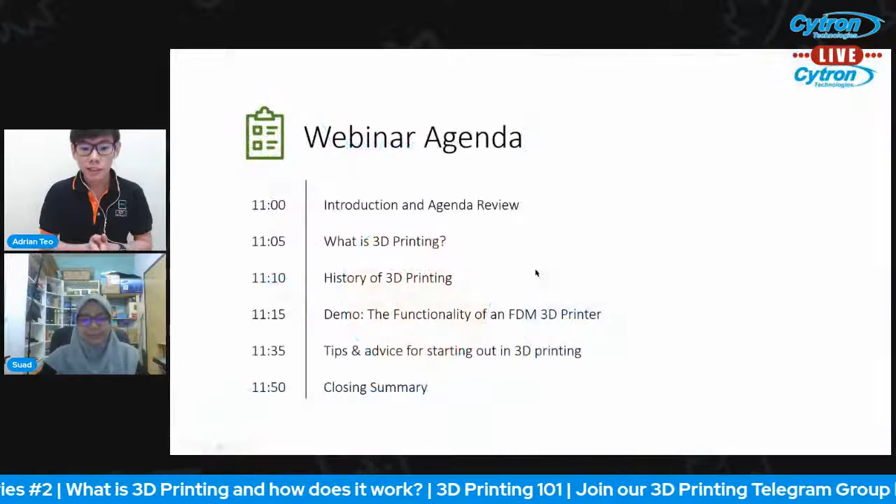So today's agenda, I will be explaining to you what is 3D printing. I'll assume that some of you are new to 3D printing or are curious about what it is. So bear with me, I will spend the first 5 minutes to explain what is 3D printing and a bit on the history of 3D printing.

These are some of the few important and interesting lessons that we encourage you to share with your students, because in order to use a technology, first you need to understand where it comes from, who it comes from, and why it's there. So I will be sharing with you what is a 3D printer, what are the types of technologies of a 3D printer, and the history of the 3D printer in the first 10 minutes of this session.

By 11:15, I will pass the floor to Suad. She will share with you on the functionality of an FDM 3D printer. I hope I answered your question, Mr. Salah Osama. So the demonstration will start at 11:15, hopefully more or less.

I hope I don't talk too much during the introduction, and then the introduction will take around 15 minutes. Okay, Suad over here, she will demonstrate with you her 3D printer. Her 3D printer right now is actually printing something, and you will be able to see it later. She will point out to you which and what are the components and functionality of that 3D printer. So stay tuned, 11:15.

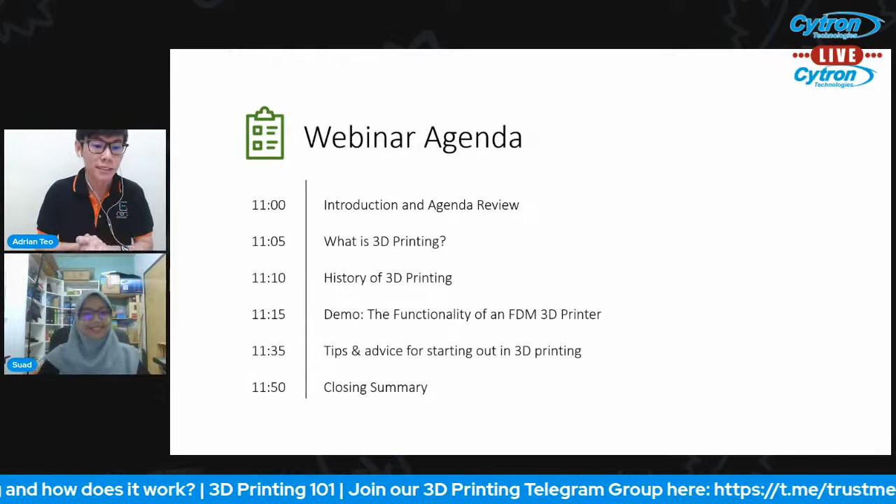This is what live is for. You ask us questions, we answer your questions live. If you plan to watch a video, you won't get the live interactions. So here, we've already got a question. Muhammad Tawfiq asked what is the difference between SLA and FDM. Stay tuned, I will be explaining this in our introduction very soon.

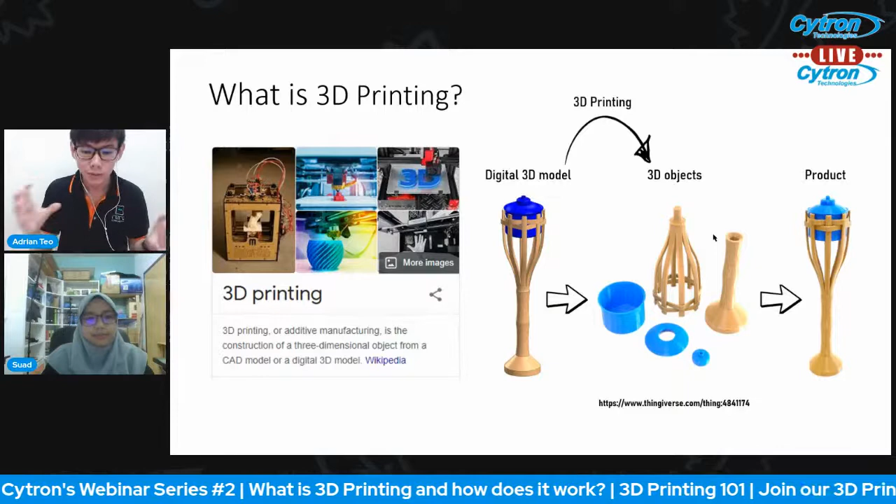So in a way, it's converting digital form to a physical form. And in 3D printing, it's similar. You are creating a product, a 3D object, from a digital 3D model. Just remember this: 3D digital model and 3D physical object, and 3D printing is going to make that happen.

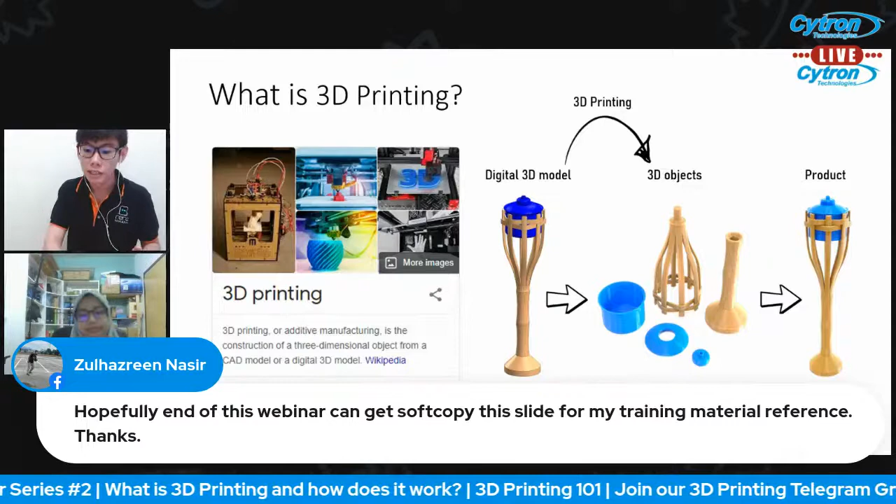So just now I mentioned that I'm going to share with you the types of 3D printing technology out there. I filtered the top three 3D printing technologies, though of course there are more out there, but these are the top three common ones, and they're commercialized so you can actually get your hands on them.

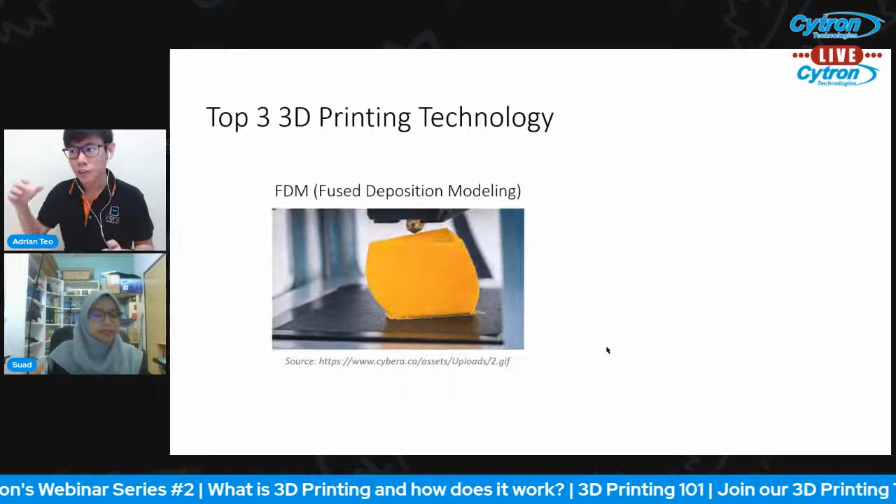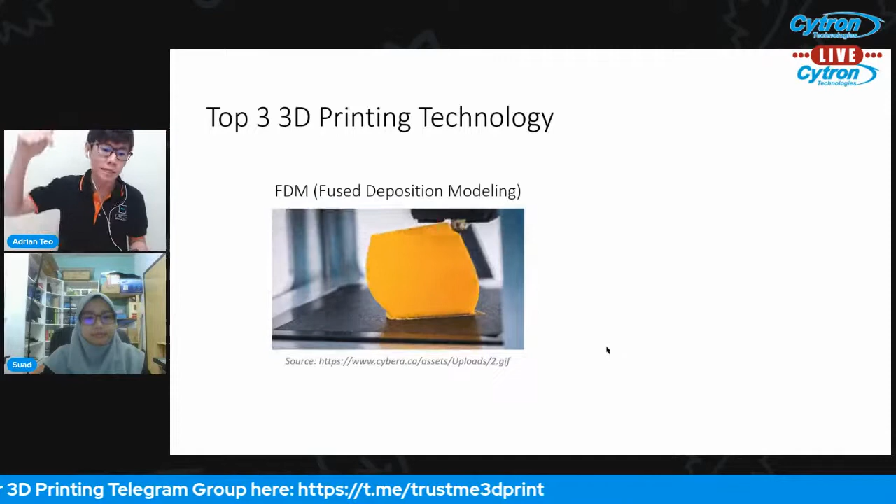The first is fused deposition modeling 3D printing, also known as FDM 3D printing. In this GIF, you will probably be able to relate to all the 3D printers you've seen on the market, or even from schools or exhibition areas, because this is the most common 3D printer out there. FDM 3D printer basically has a nozzle at the top where it melts the material and prints the object, creating it layer by layer. So this is fused deposition modeling 3D printing.

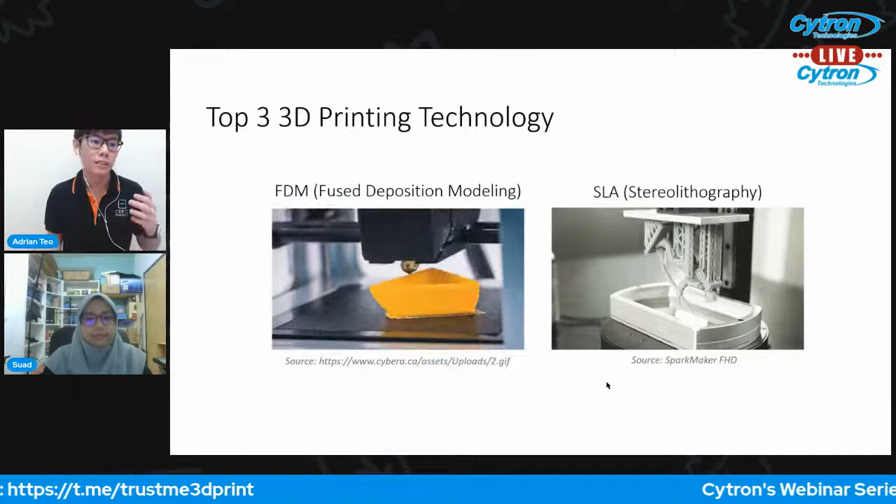Then we have the SLA, stereolithography apparatus, or short SLA 3D printer. SLA 3D printer is a resin curing 3D printer where it beams down laser on the resins to cure them so that it solidifies and creates polymer for your object. If you compare FDM and SLA, they are both totally different technologies, but they still print 3D objects. Both share different benefits, and also have their own advantages and disadvantages. Right now I'm trying to explain to you the differences of these 3D printers.

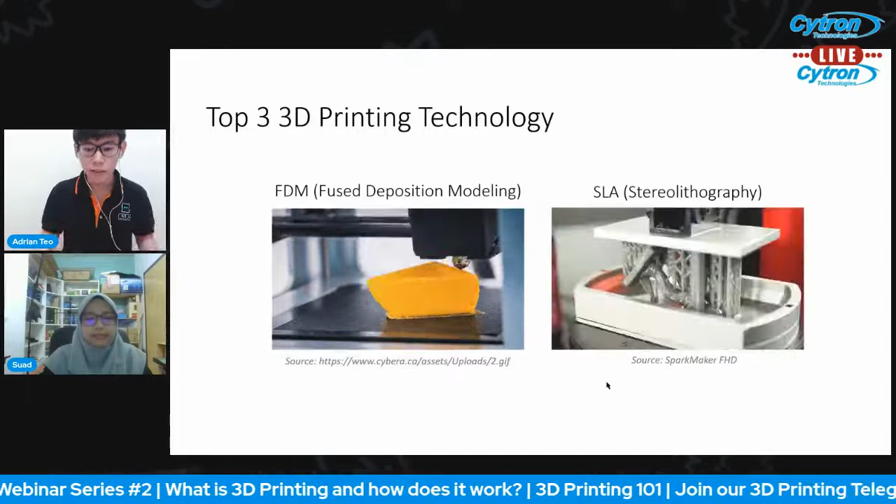Later on we will have a demonstration of an FDM 3D printer, a very common 3D printer out there. It's not messy, we won't be using resins, it's very clean, and anyone can own one.

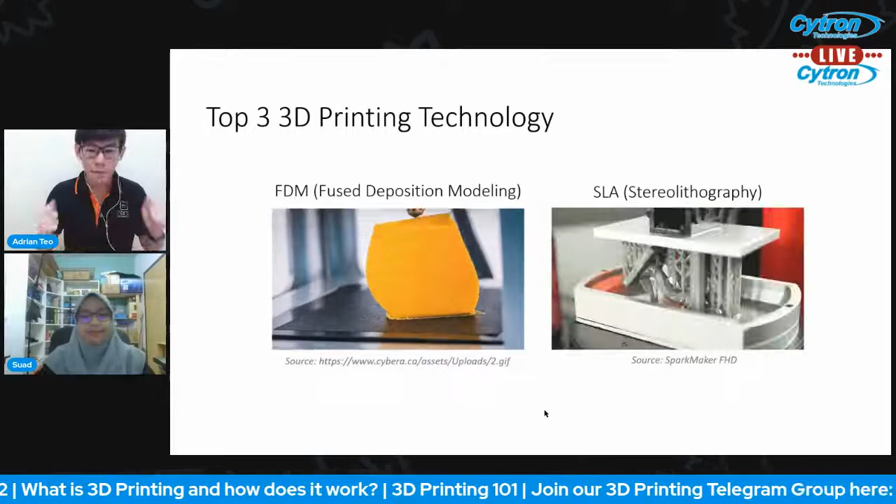SLS uses powder, and it still uses laser. In the name, you see laser sintering: the laser beams down on a layer of powder, and once the high power laser touches the powder, it will join or create a bond between the powder particles to create a polymer. So this will then create an object layer by layer.

So it will first cover a layer of powder, and beam the powder. The area that the powder touches with the laser will then solidify. Then it puts another layer of powder, and the laser moves again, and it goes on layer by layer. This is a very accurate method, but it's of course a bit dusty, a lot of powder. As you go on layer by layer, you're creating a very accurate 3D object using lasers.

All right, let me recap. Three types of 3D printer: first, FDM; second, SLA; and third, SLS. First, you use plastic material. Second, you use resins. And third, you use powder.

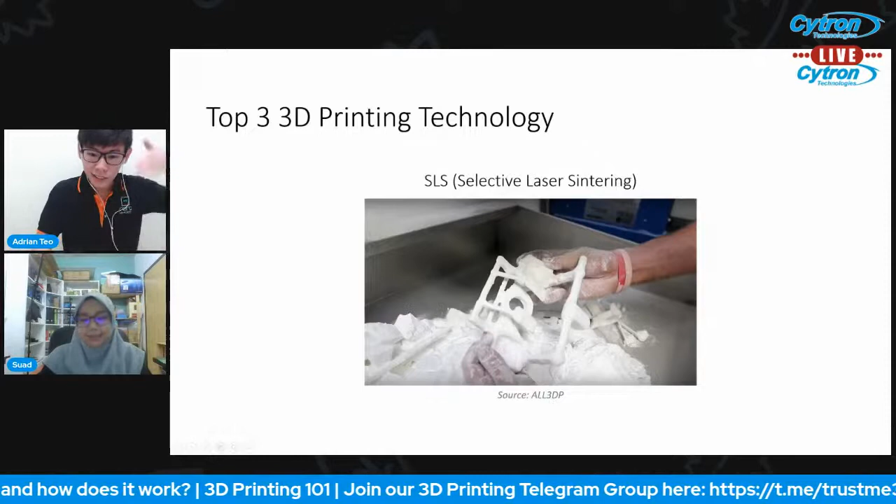Quick question: if you were to choose a 3D printer, what type would it be? Good question, Sharman.

If you're talking about the types of 3D printer I just mentioned, those three types, first you have to identify what quality you want to print in, and then the cost. Do you want to create only something small, or something big? Do you want the parts to be very accurate, or just normal accuracy? So everything matters — your final product matters, what kind of product you want to create. I'll share more detail on the advantages and disadvantages of each technology. I can quickly give you an example.

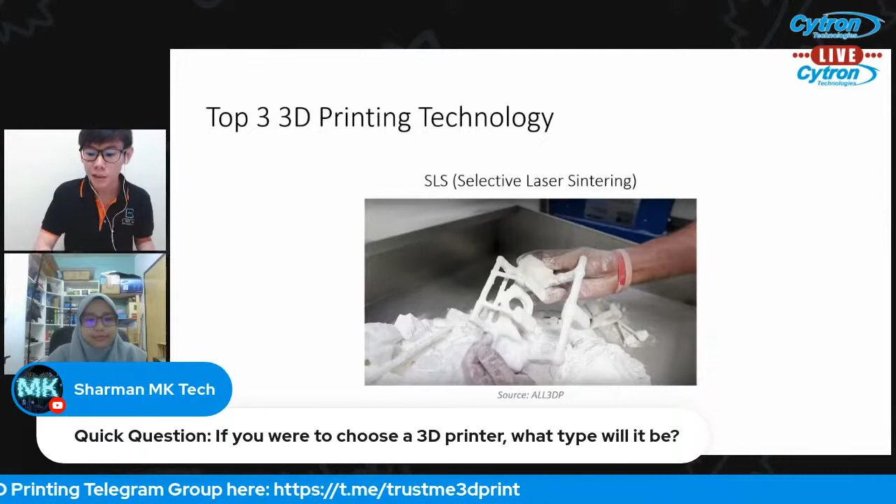SLS and SLA are able to provide a better accuracy product. SLS doesn't need support to print your object. SLA needs support, FDM needs support. That's one example I can give you right now. But I'll be able to give you more details after this session in the Telegram group.

Let's continue — the history of 3D printing. This is like your sejarah class, but I hope it's more interesting. I hope you stay with me for just 5 minutes as I go through this timeline of 3D printing. Take it as a storytelling.

In 1981, Dr. Hideo Kodama was the first person to file a patent for rapid prototyping technology. I didn't mention the word '3D printing' in 1981 because no one knew about 3D printing at that time. Dr. Hideo Kodama patented rapid prototyping technology, which at that time was actually SLA, a resin curing system. Unfortunately, due to some funding issues, Dr. Hideo Kodama did not manage to complete his application for the patent, so it didn't really get through.

Three years later, in 1984, Charles Hull — a very important figure in 3D printing history — invented the SLA patent, the stereolithographic apparatus. He patented it in 1984 and got it accepted in 1986. In that same year, 1986, he started his company known as 3D Systems, which is a very famous 3D printing company today. If you Google 3D Systems, you'll see them everywhere, creating 3D printers for the industries.

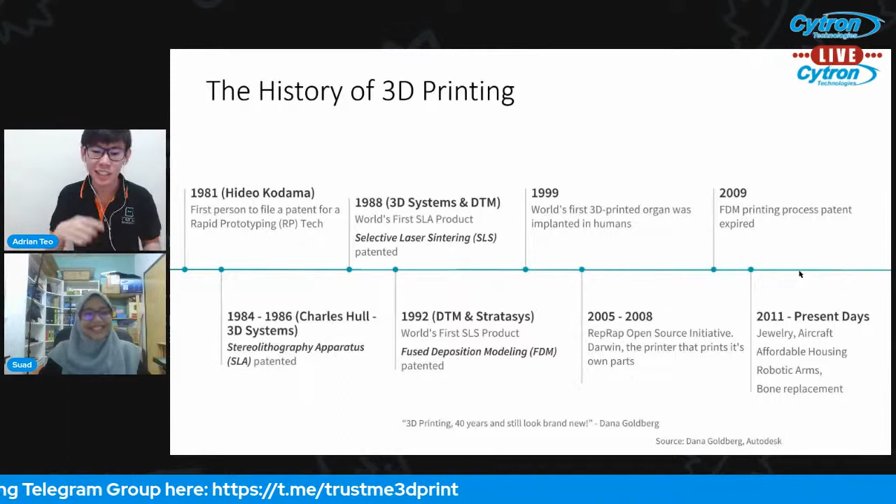In 2005 to 2008, that's where the open source revolution started for 3D printing, initiated by RepRap. The first 3D printer they created is Darwin, a printer able to print itself. That was the most famous printer back then. I even recall in primary school and high school talking about the machine that can print a machine itself, and that machine can keep on printing machines. You'd be rich, you could keep on printing machines. That's actually the printer we talked about back then. RepRap started the open source initiative.

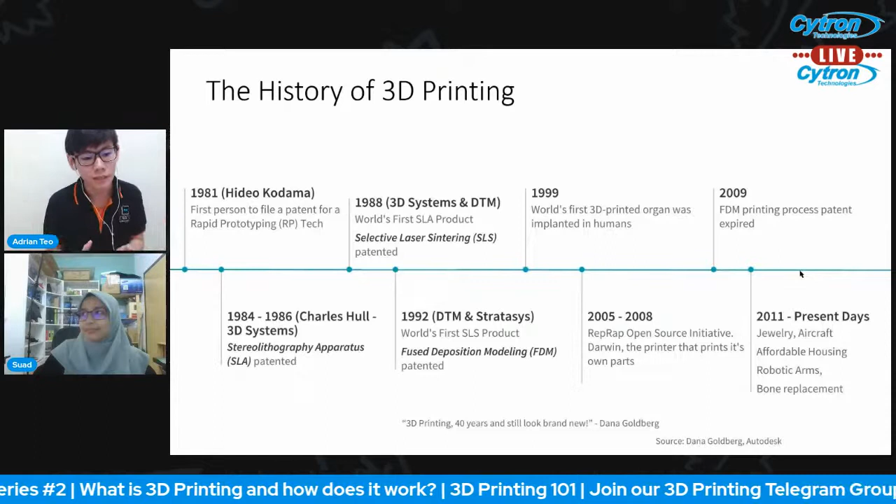It didn't kick off rapidly until 2009, when the FDM printing process patent expired. When a patent expires, everything changes, especially the cost. In 1992, Stratasys patented FDM 3D printing technology. In 2009 the patent expired and the price dropped from 10,000 USD down to less than 1,000 USD. That's when the community finally got their hands on 3D printers. It doesn't mean the printer wasn't available before, it was just super expensive. Once the patent expired, the printer became so cheap, everyone got a 3D printer after that.

After 2009, a lot of startups came in and started building their own 3D printers. Two big companies I can think of are MakerBot and Ultimaker. They came in and built their own 3D printers. After 2009 you actually see a lot of new, affordable 3D printers on the market. That's 2009, 2011 to present day.

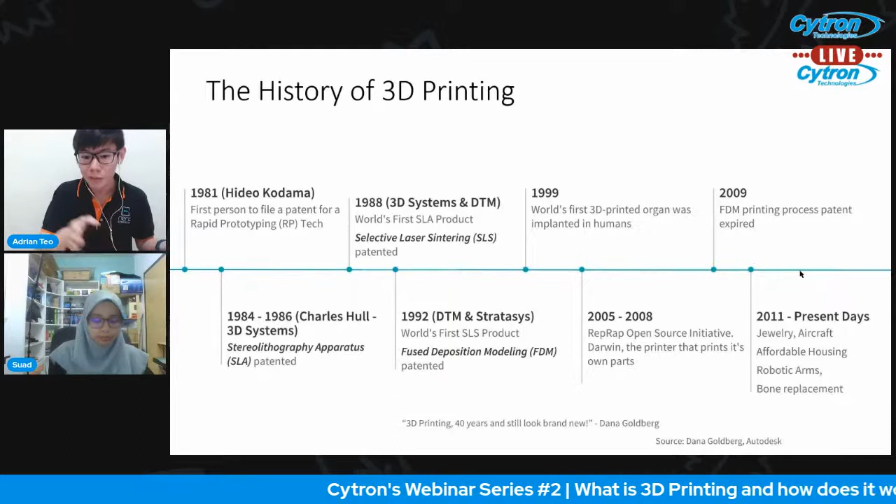Until today we see a lot of innovation in 3D printing technology. People created robotic arms, bone replacements, jewelry, they even built houses with 3D printers. There are a lot of innovations happening around the world because today 3D printers are very affordable, from 10,000 USD back then to like 100 USD today. The difference is huge in 3D printing history.

I'm not going to dwell on the history any longer. I hope you understand the timeline of where the 3D printer comes from, how it came about, and why it's so cheap today.

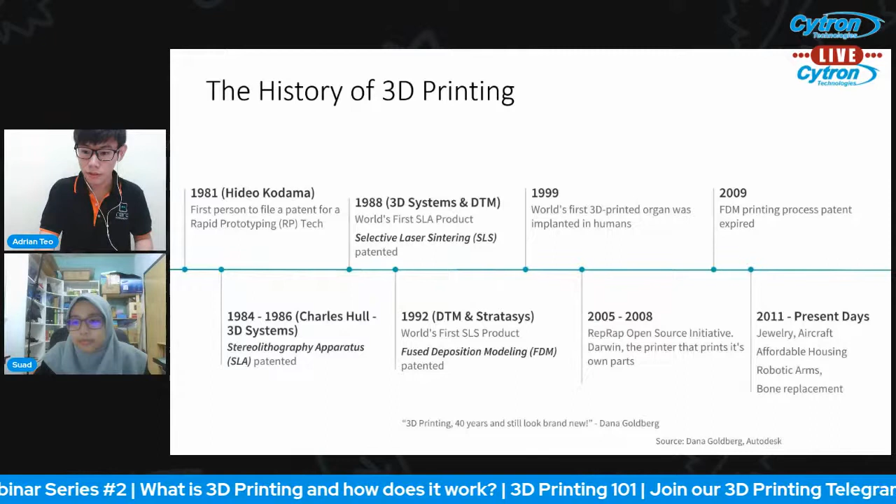As I've mentioned, the 3D printed organs are actually fully functional, especially the organs these researchers created today are fully functional. They use human tissues to regenerate cells and create actual functional organs today.

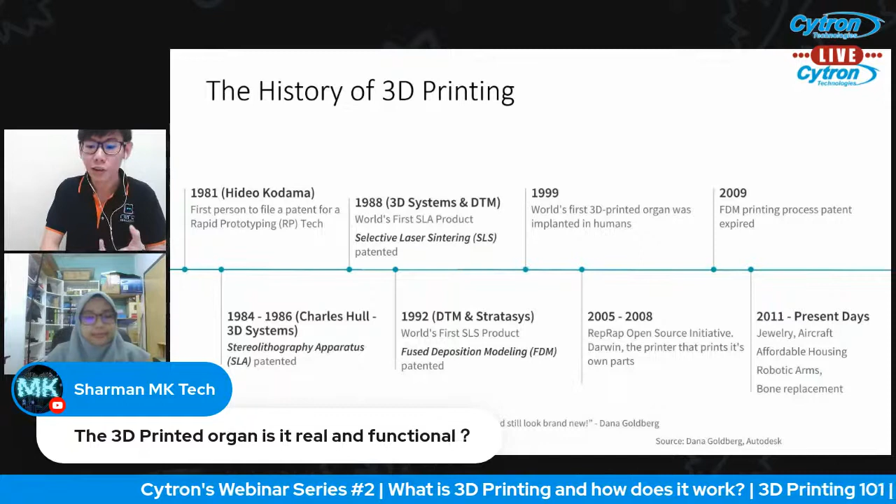Let's take a look at another question: how to standardize printing cost based on rate per gram, since there's now too many obvious price offers from other 3D printing players. The 3D printing cost is totally destroyed, to be honest. 5 to 6 years ago there was stable pricing for everyone commercially, but after 3D printers got too affordable, everyone started venturing into this business, so the price is no longer in control. Everyone gets to decide what price they want, and the price is getting cheaper and cheaper by the day. But in the end we still rely on filament cost, and the filament cost is always fluctuating up to today.

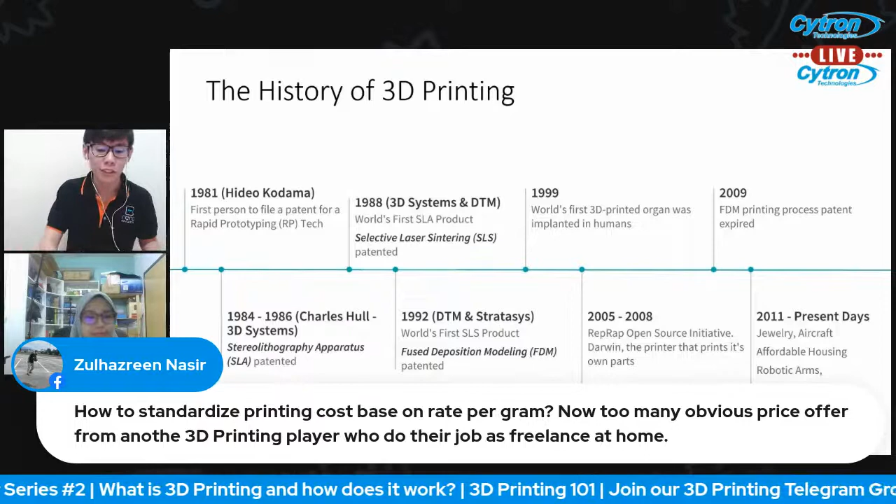She will share with you her 3D printer, which is running right now, ready for you to enjoy. Okay Suad, thank you. Hi everyone. So Adrian, can you share mine?

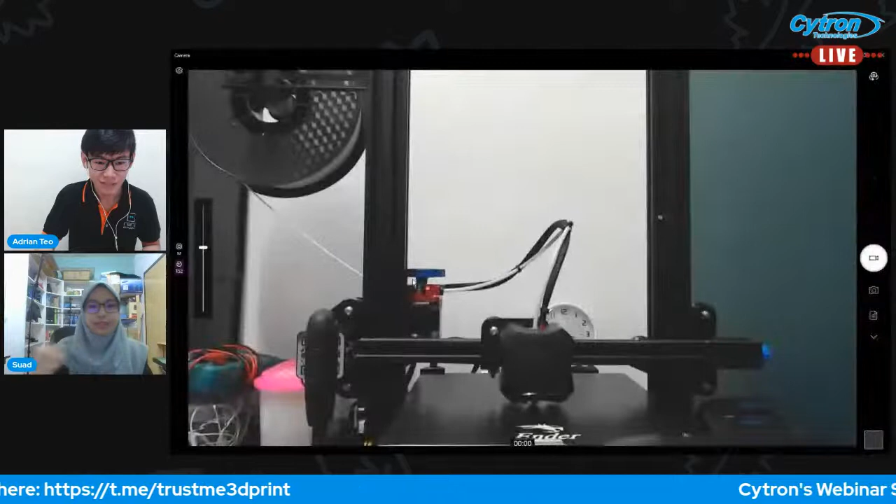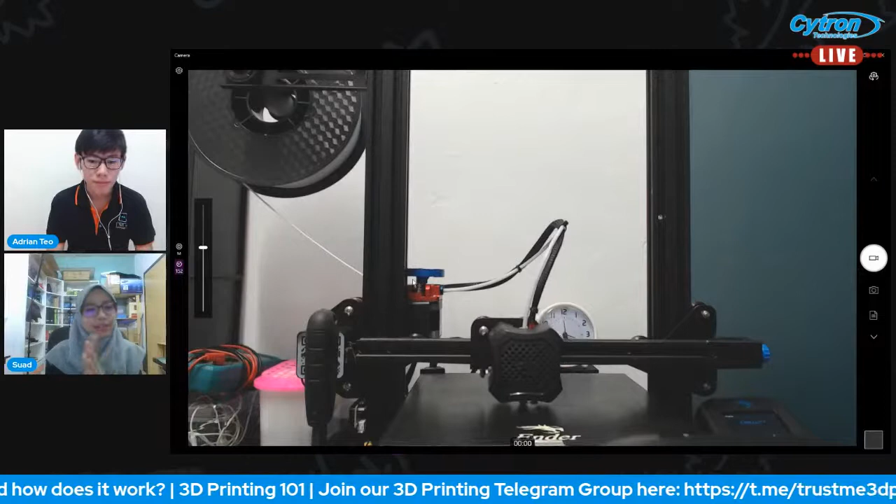I would like to introduce to you guys my first 3D printer. I've used this 3D printer for around 8 months - I think I bought it last year during COVID. So many people were helping frontliners using 3D printers, creating face shields and mask extenders, and I was interested to be part of it, so I bought a 3D printer.

So this is my 3D printer, and this is an FDM 3D printer. Can you guys tell me what brand I use? Anyone? So the brand is Creality, the Ender 3v2 - that's the one I bought. Wow, so many people answered correctly. Yes, it's Ender 3v2, not just Ender 3. We have two versions, V1 and V2, but mine is V2.

So first I would like to introduce to you what an FDM 3D printer is and how it functions. During this session, you will need to remember three important things - three important components. First, an FDM 3D printer creates objects by melting plastic material. This is, you guys can see, right?

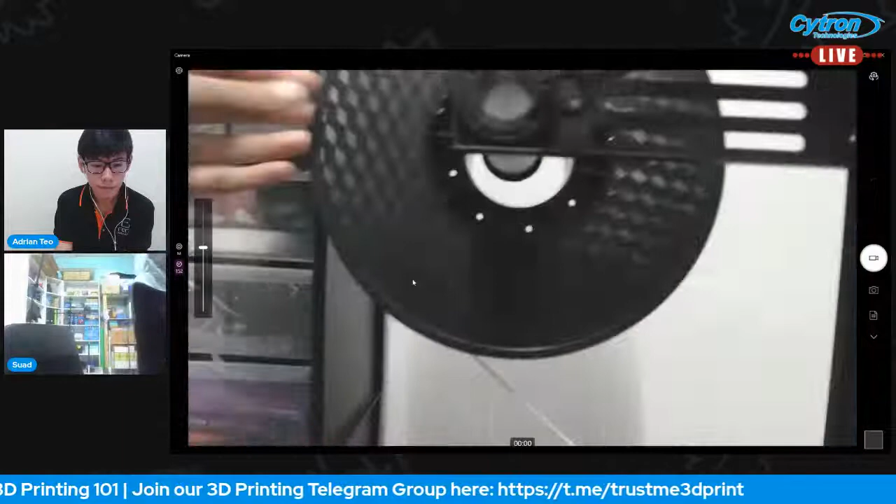Let me just stand. Alright, this is the plastic material that we are using to print, and the material is PLA - the filament that I use is PLA, and I'm using a white color PLA filament. An FDM 3D printer is able to work with different types of material with different characteristics, such as ABS and TPU, but what I'm using is PLA because I heard that PLA is good, especially for beginners. That's why I use PLA compared to other types of filament material.

That's the first thing you need to remember - we need to have a filament. Then the filament will go into the extruder. This is the extruder, you guys can see, right? So the filament will go into the extruder, then go through the tube, and then go to the nozzle. Can you guys see the nozzle?

The nozzle is currently melting the filament and printing something. Never touch the nozzle so that you won't lose a finger. I never touch it because I'm not that brave.

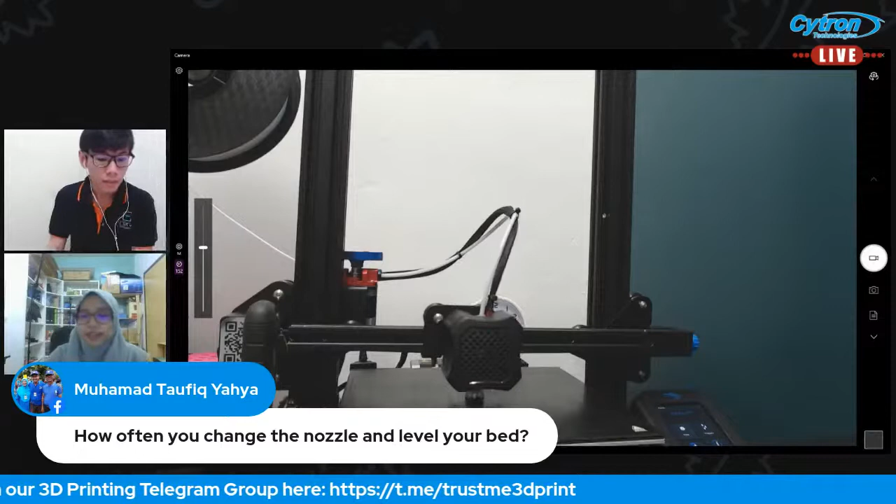How often do you change the nozzle and level your bed? Actually, I've never changed the nozzle before because it still works perfectly. But if you ask me how often I level my bed, whenever I print something, I will level the bed.

If the bed is already okay, and when I remove the filament or the 3D object from the bed easily, I will not level the bed. Unless when I start to print and the alignment is a bit off, not flat. When the filament doesn't stick to the bed, then I will do the bed leveling.

Okay, so you have to take note on that.

Let me add a bit on this question. The nozzle, if you print a lot, you may need to change it very frequently. But if you print a small amount of items and take care of your nozzle, clean the hole, brush it, keep it clean, it can last you for a very long time. But if you print something like ABS or high temperature items, the nozzle will wear off very quickly because it's made of brass. You knock the nozzle a bit, the hole will become smaller or deform, then you will need to change to a new one.

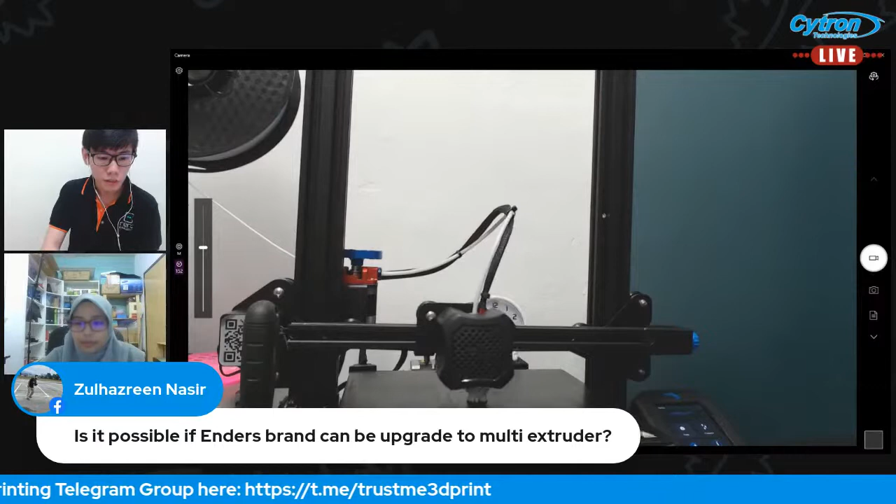Let's move on to the next question. I think I can take this one. Is it possible, if the Ender brand can be upgraded to multi extruder?

I would say yes, if you know which firmware you need to upload. Multi extruder means you can print multiple colors. You can put multiple filaments into multiple extruders, and have multiple nozzles to print by changing different filaments. So it's upgradable, yes, but you may need to change your firmware, as it may not support multiple extruders by default. I believe it's quite flexible for Ender printers, you just need to find the right firmware.

Okay, let's see. All right, this question, would you like to take it, Suad? Do you need a high-end notebook to support this 3D printer?

I'm not sure actually about this, but when you want to print something, you need to slice it using a slicer, for example the Cura. If that software can run using your notebook, computer, or laptop, then it will be okay. You don't need a high-end notebook to support this 3D printer.

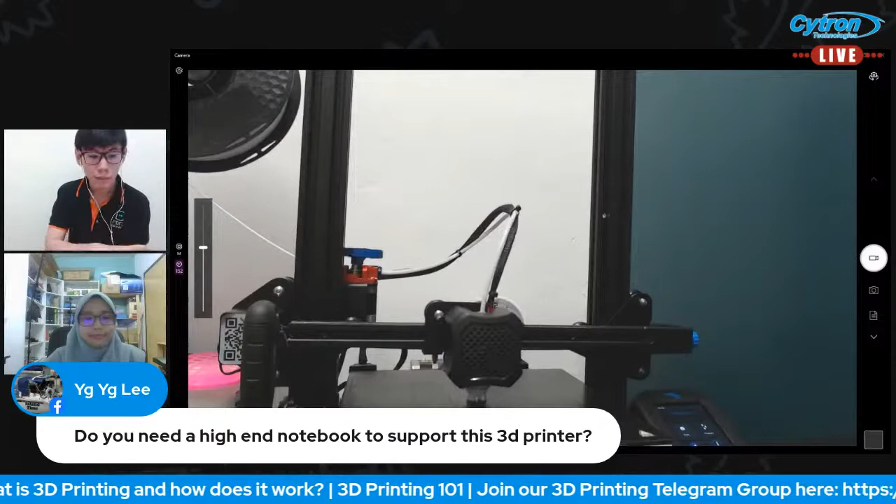Let me shine some light on this. To be exact, you don't need a supercomputer or a very high graphic computer. I am using an i3 laptop with no graphic card, only an Intel graphic card. An 8th gen Intel i3 with no graphic card, and I'm able to run 3D modeling software and Cura software. As long as you're able to run those software, you can convert and process your files for the 3D printer, and that's fine.

The laptop that a lot of schools in Penang use is actually just over 1,000 ringgit, and it works well. You don't need a very high-end laptop, that's my opinion. Thank you for the question. Let's take one more question, and then we proceed to the next part of this presentation.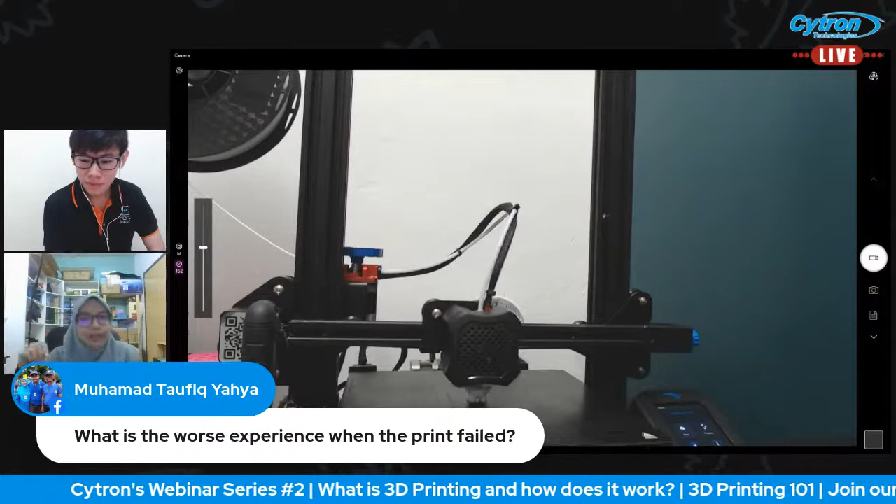Okay, this is interesting. What is the worst experience when the print fails? I don't think the worst experience is when the print fails, because you can always print new things whenever it fails. But if that thing takes like a day to print, and it fails, then that will hurt a bit.

But I think the thing that hurt me the most is, since I'm a beginner, you guys can see there's a lot of scratches on my bed.

That's not so beautiful, and that hurts me most compared to a print fail, because whenever the print fails, I can always print new things, but if the bed is already scratched, that scratches your heart too. You need to buy a new glass bed already. I think that's the worst experience. You need to level your bed properly before you start to print, that's the most important thing I think. I think that's one of the worst experiences anyone can get - when you first print, it starts scratching your bed already, and you've spent so much money, and then you see the bed printing.

What I would advise for anyone who has ever thought of 3D printing or started to 3D print, is you have to be ready that there will be a lot of failures, because you won't know what's going to happen. You can check your bed, your nozzle, your temperature, your software, you check everything, and in the end it still fails. So 3D printing has a very steep learning curve. It's a fun way to learn because you will be getting a lot of problems. Today you will get bed issues, tomorrow nozzle issues, and the day after filament issues. You will get different kinds of problems.

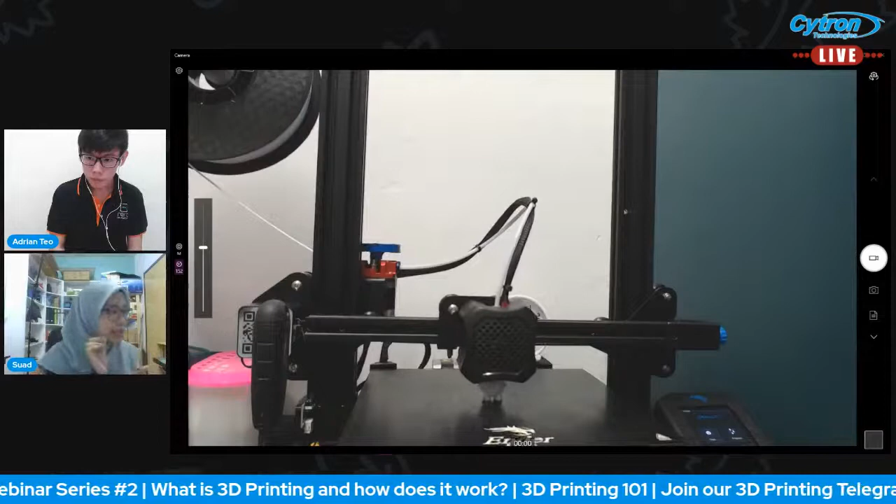So that the model can stick. Yes, very true, okay. If the temperature is low, the filament will not stick to the bed and then you can't print. Thank you, Muhamad Taufiq. Yeah, because it helps the filament to stick to the bed. Last time I also had a problem where the filament didn't stick to the bed because the temperature was not properly set. So you need to heat up the bed properly, to a certain temperature, so that the filament will stick and print your 3D object.

So over here, can you guess what I'm printing right now? You guys can see, right? I'm printing something. Wait, you can't guess? Wait, let me adjust my camera. Let me adjust the zoom focus. How to see, cannot see clearly. Is this better?

White guy, Among Us character. No, it's actually this one. A Marvin keychain.

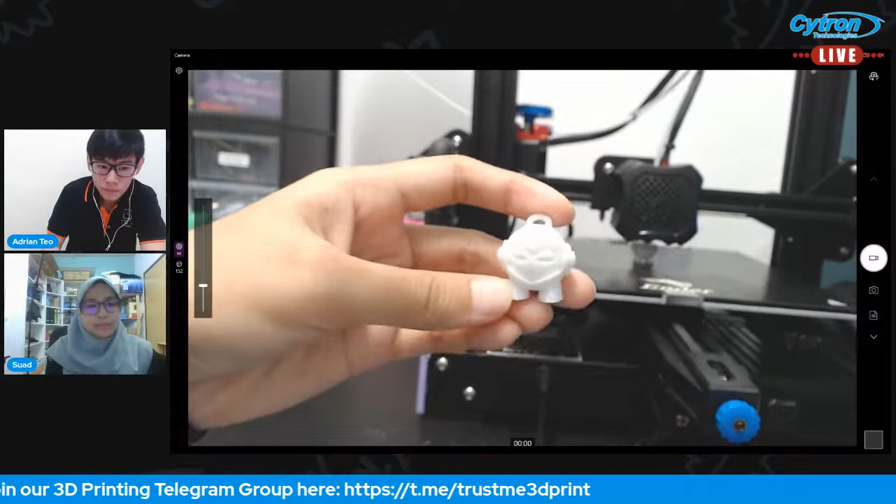You guys see? Okay, actually I printed this before we start our webinar series. When Adrian starts to talk his part, this one is already finished printing. And then I print a new one. So that is the new one. Okay, let me just wait.

Okay, when you want to start a 3D printer, you need to insert an SD card here. Let's see, right? But then I don't have an SD card here. Why? It's so mysterious, right? I didn't insert any SD card, but how come this printer prints a 3D object? I will share with you guys later.

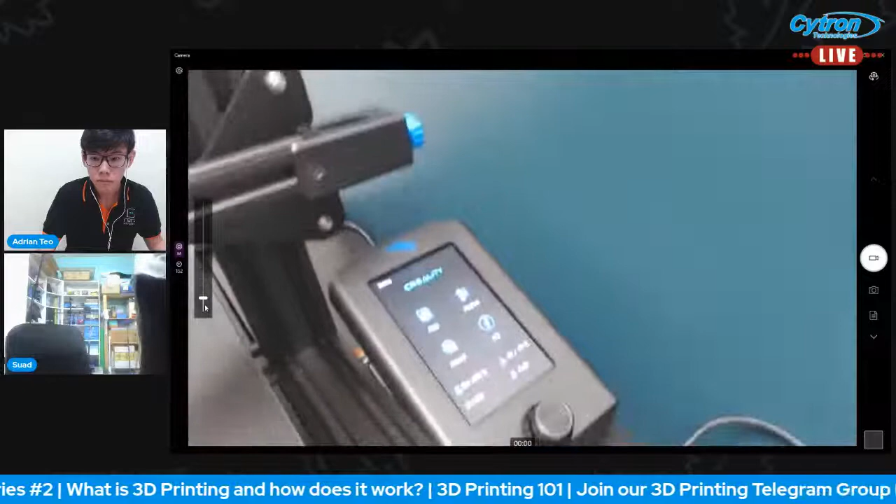Okay, and this is the control panel. Let me adjust this. Okay, you guys can see there is... oh no, not so clear. Just this. Only this part. Okay, so this is the control panel where you can control everything through here.

Okay, this is the print option, and then this is prepare, and then this is control. You can just move this, turn this knob, to do whatever you want to do with the printer.

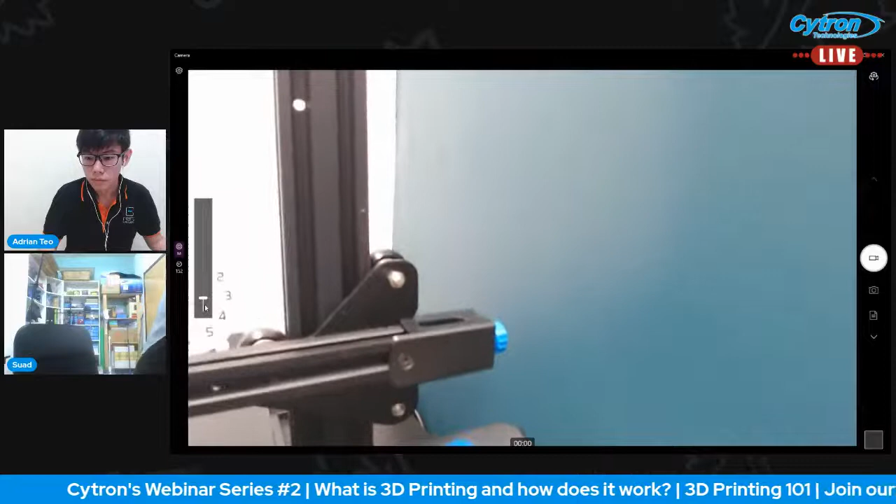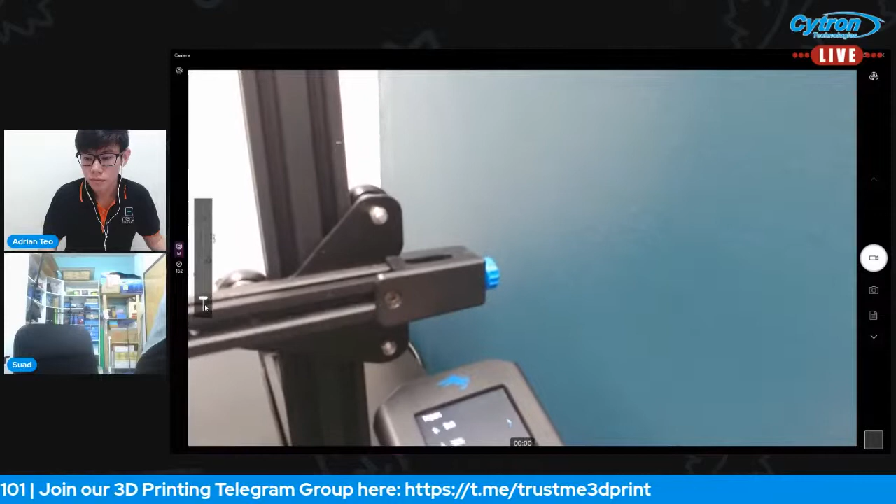Let's say I press for the prepare, and then you have a choice here to set it to home, set the home offset, preheat the PLA, preheat the ABS. But I'm not using this. During the printing, you can't actually disturb the control panel because it will stop the printing process. But today I can do that because I'm not using the control panel to control the printer.

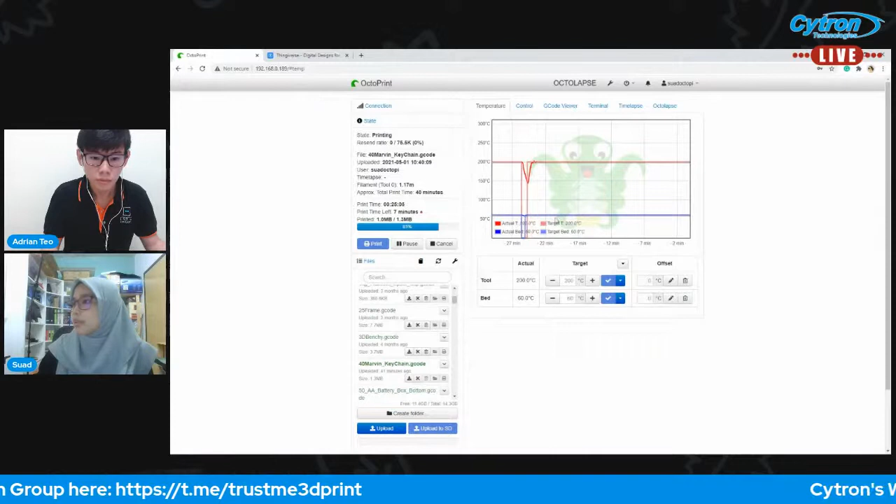As you guys can see here, I have a Raspberry Pi, because I control it using my OctoPrint. Let me see here. So this is my OctoPrint. You guys can see the temperature here.

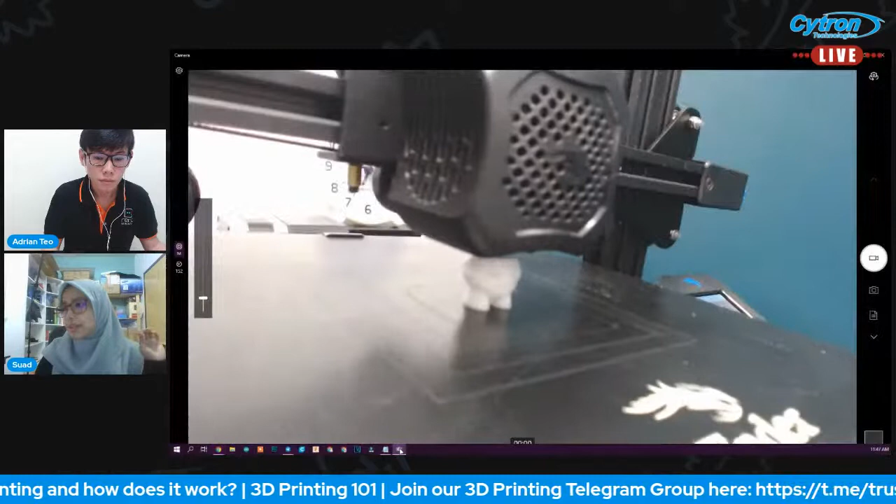And then this is the camera for the OctoPrint. I have two camera set. One is this, and then another one is for the printer itself, so that you can see what happened to your printer whenever you are not with your printer, through your network. This is how I control my printer using OctoPrint.

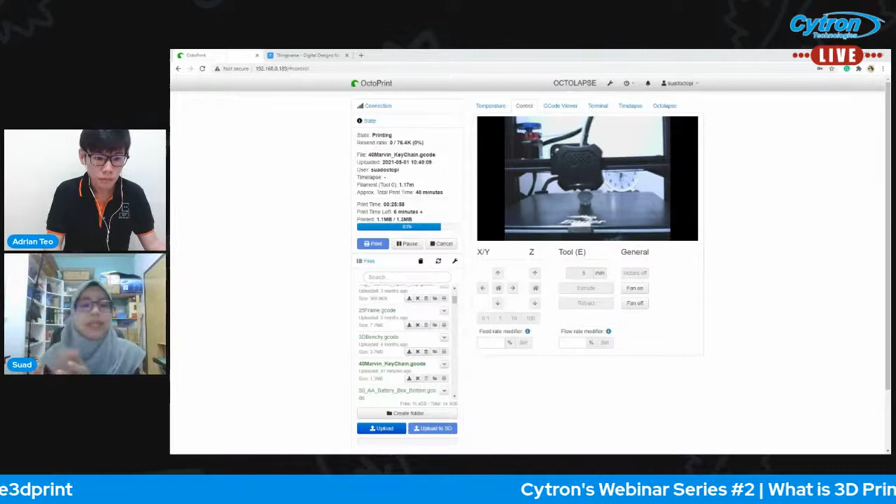And then another thing that you guys can know, there is so much upgrade, so much more things that you can learn from just printing a 3D model. You can also do OctoPrint, and you can also add BLTouch to avoid scratching your bed, because BLTouch will help to level your bed properly.

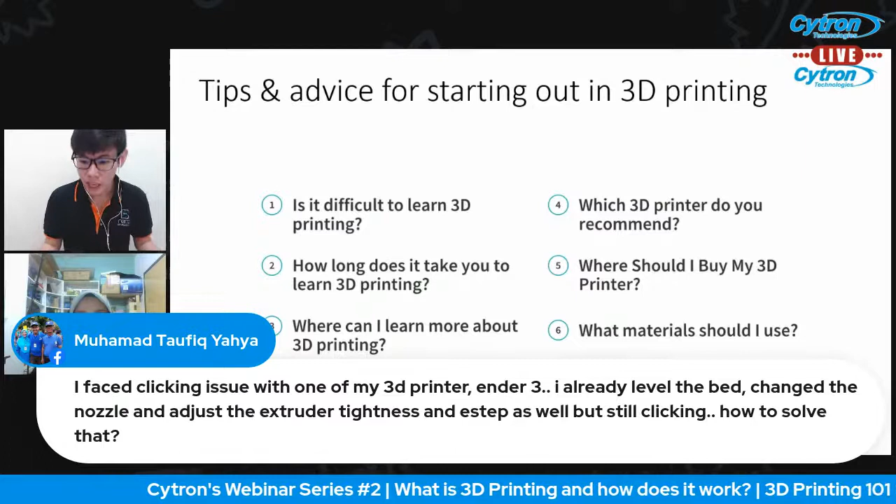I face clicking issues with one of my 3D printers. I've already leveled the bed, changed the nozzle, adjusted the extruder tightness and E-steps, and it's still clicking. How to solve that? This may seem intimidating to people who are still learning 3D printing, because there are so many issues you get every day. You want to print something and it doesn't work. But don't be afraid, you just need to ask someone how you can solve your problem. The expert may not have the straight answer, you will have to go from point A to point B to point C to get your answer.

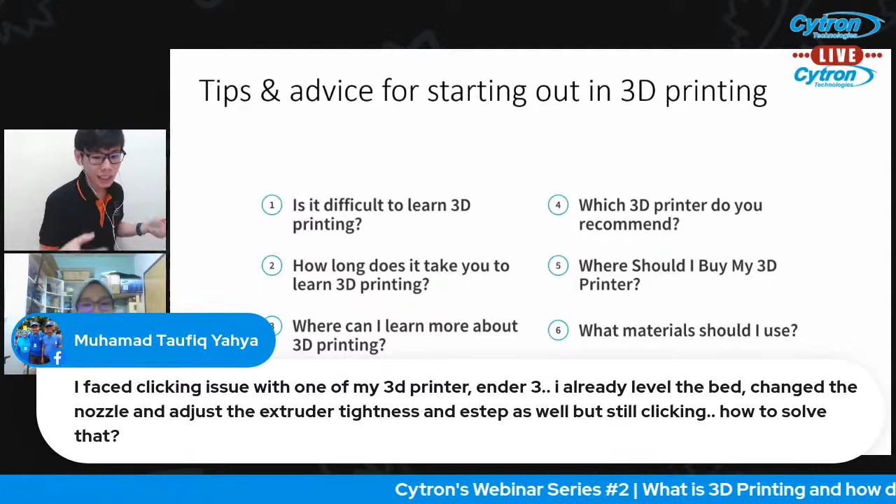So right now, I've seen that all the steps you've done are level the bed, change the nozzle, extruder tightness, E-steps, but you haven't looked at the filament yet. It could be the filament has already absorbed moisture or is already wet, so you may need a dehumidifier, or you may need to dehumidify your filament. You can try using a new set of filament to see whether the issue repeats. If the problem disappears, it means your filament was already wet, so you will need to take care of the filament.

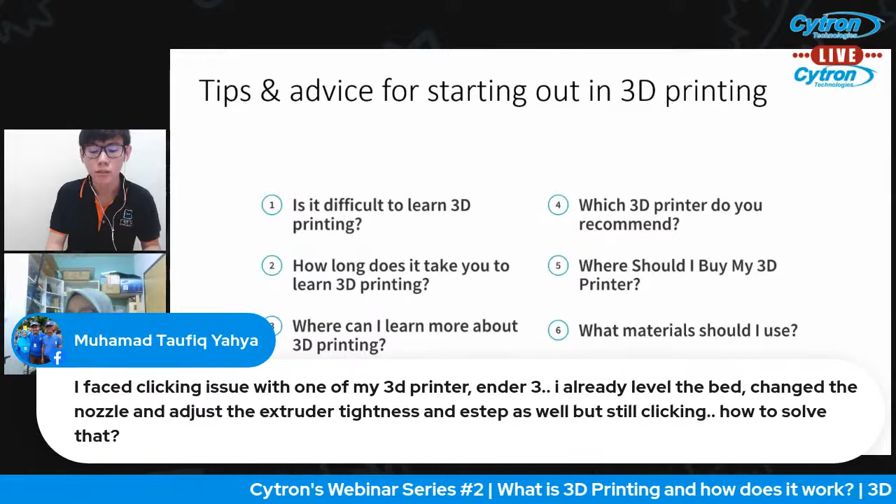So again, every issue you face in 3D printing has a solution. It's an open source machine, you will surely face problems, things will wear out, but that doesn't mean there won't be a solution.

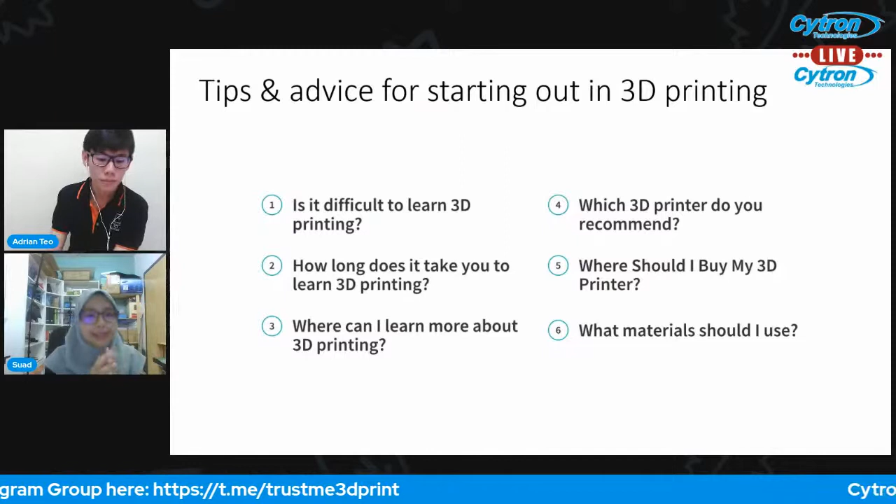For me, because I already have a mechanical background in these things, I don't think it is very hard. At first I had a mindset like, should I buy it? Should I try it? Is it difficult? After doing some research and asking so many people about this 3D printer, I decided to buy one and try it myself. I found that at first it's a learning process, there will be some difficult parts and some enjoyable parts. When you're able to print something using the 3D printer, I think that will be the best moment.

What about you? Is it difficult to learn 3D printing? I am not gonna lie, it's not easy, but it's not very difficult. You don't need an engineering bachelor to learn 3D printing. You can be an art person, you can even be an accountant to learn 3D printing. There's no fixed background that you need. Imagine it like a toy, but an advanced toy for you to practice making things. So 3D printing is just that. You don't have to worry about how difficult it's going to be, because you will have a lot of things to learn, unless you hate learning, then I'm sorry. But yeah, it's not difficult.

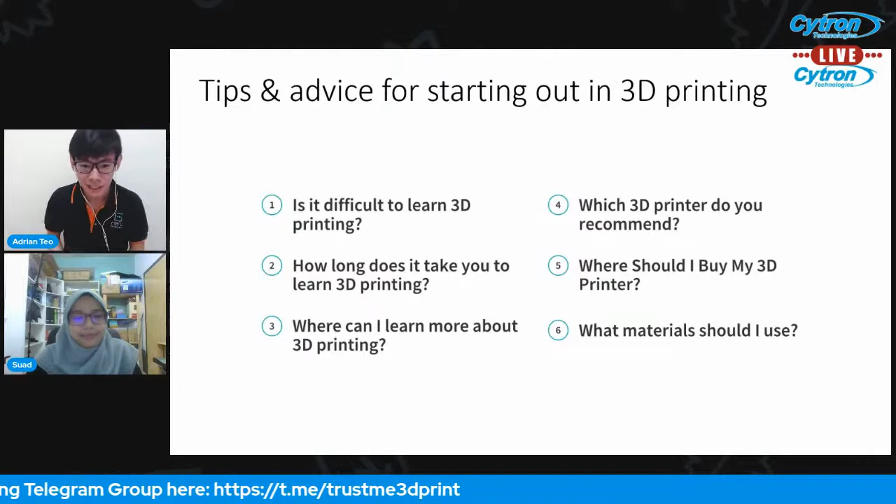I've been practicing 3D printing for the past 5 years, and I'm still learning today because there are so many new problems on my 3D printer every single day. So I'd say it's a lifelong journey, you have to learn every single day. Some days you take one day to learn how to get it working, but it takes a long time to really understand it.

Thank you for your answers, keep it coming. Question three: where can I learn more about 3D printing? This one, I just go to YouTube, Google, and of course I will always ask Brother Adrian about 3D printing because I don't know who else I should refer to.

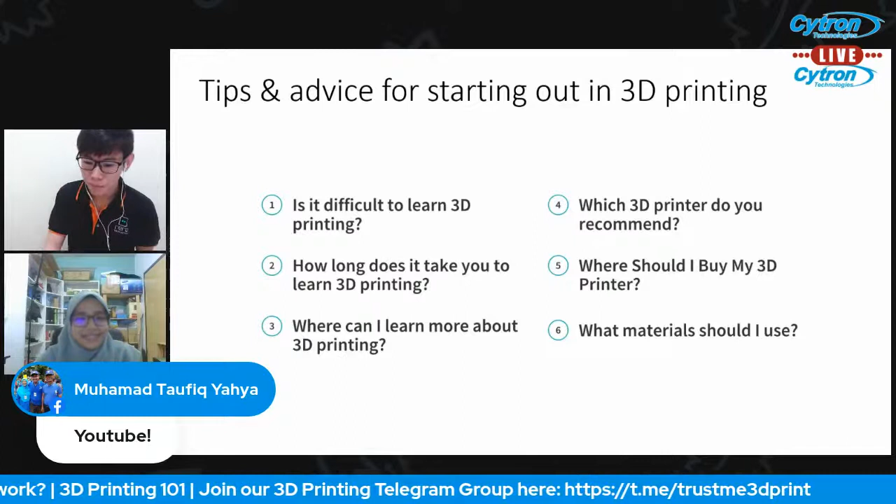Yeah, YouTube, that's the best answer. YouTube, Google, that's the best answer. Imagine 3D printers came out 30 years ago, no YouTube, no Google. But today we have an abundance of resources online. Use it a lot.

But one advice that I would strongly recommend is if you are planning to get a 3D printer, get one that is already well known to everyone, to the community. Don't get a brand new 3D printer that no one knows about, no one knows how to fix, and there's no support — then you'll be the only one fixing your own problem, and no one is able to help you. So get a popular 3D printer, a well-known brand.

This leads to our next question: which 3D printer do you recommend? For me, since I only have one 3D printer right now, I don't have any other to test out. But if I would recommend you guys buy a 3D printer, if you're a beginner, I'd suggest the BIQU B1 over the Ender 3 V2, because the Ender 3 V2 needs you to assemble a lot of things, compared to the BIQU B1, which is very easy to assemble. That's my answer — BIQU B1.

Thank you. So everyone has a different preference on 3D printers. I'd highlight that you need to know what you want first — what you want to print, how good you want it to be, how many you need to print — before you decide on a 3D printer.

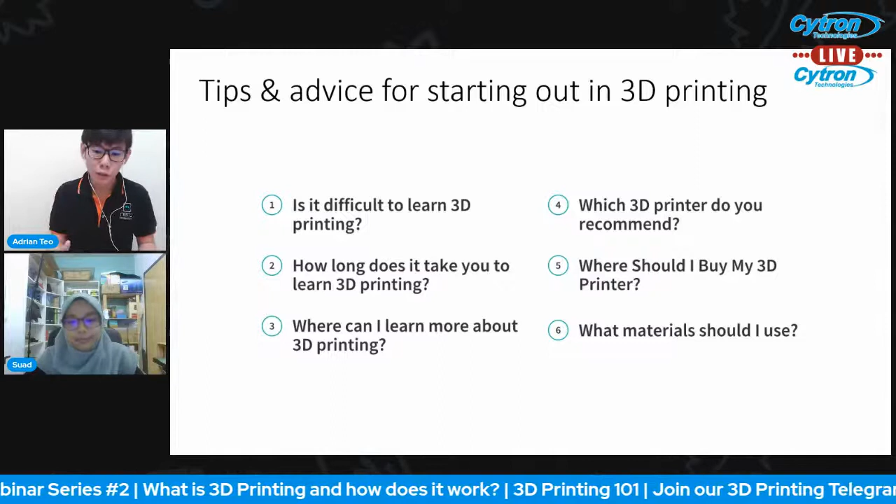Because we're running out of time right now, I'm going to quickly go through the remaining questions. But of course, bring these questions to our Telegram group later and we'll be able to answer you. If you don't know what to ask, these are the questions you should ask if you're not sure about 3D printing. Ask us in the Telegram group, the link for which I'll be sharing with you later. So, question 5: where should I buy my 3D printer?

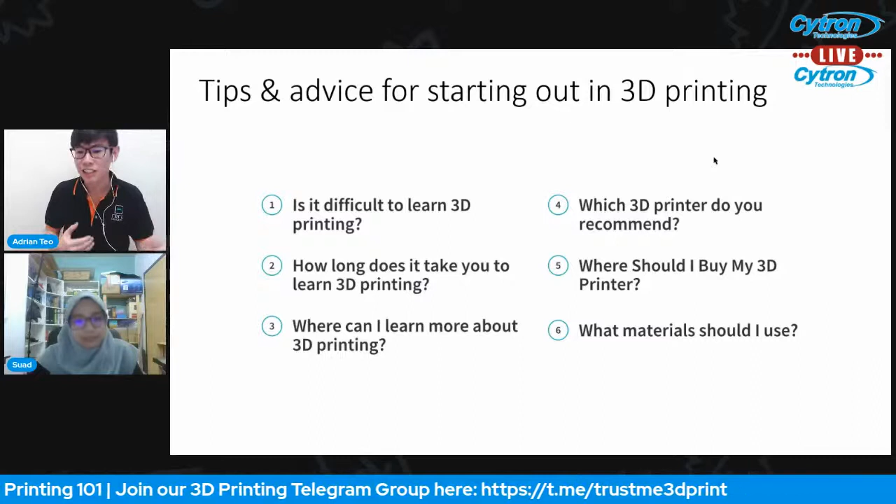I would say find a local supplier, or you can get it from Cytron. Don't buy it from America, the US, or another different country, because if you need help, you're not going to get help immediately — you're going to get a lot of delays. So look for a local supplier that you can trust, people who can help you.

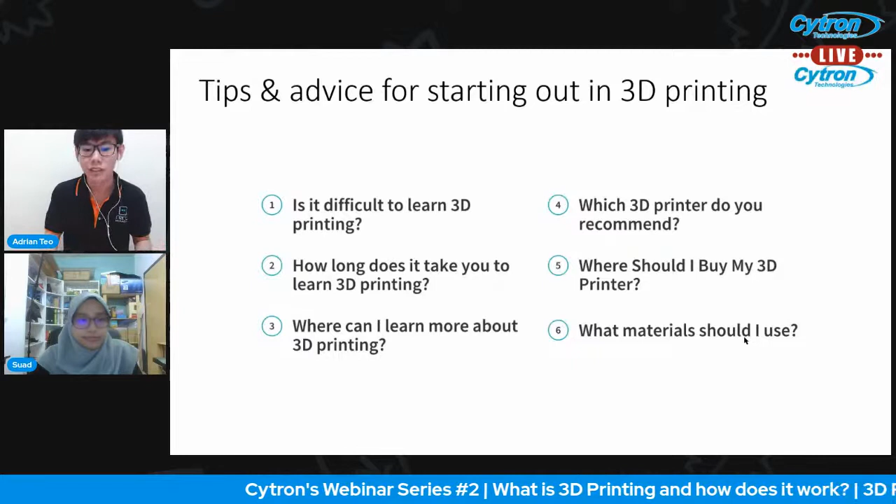Number 6: what material should I use? This is a whole topic itself. Just now Suad used PLA, and I'm not going to delve into that, but PLA is the best material out there for beginners to try. The material in 3D printing defines the difficulty of 3D printing. If you print a different material, you're going to get a whole different difficulty level. So bear in mind that the material matters — it changes the difficulty and the level of how you use your 3D printer.

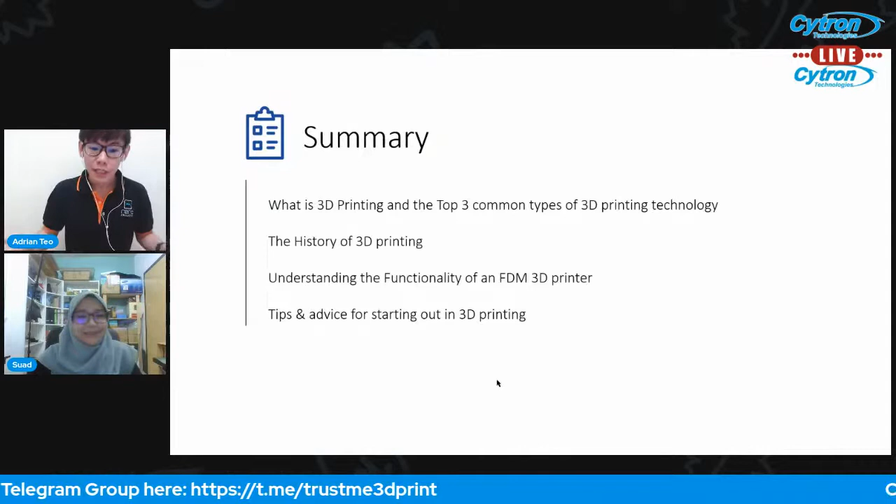Today we covered what is 3D printing and the top 3 common types of 3D printing technology. I hope you still remember the top 3: number 1, FDM 3D printer; number 2, SLA; and number 3, SLS. Three important 3D printing technologies. Then I covered the history of 3D printing. And the third one is understanding the functionality of an FDM 3D printer — Suad demonstrated how a 3D printer works.

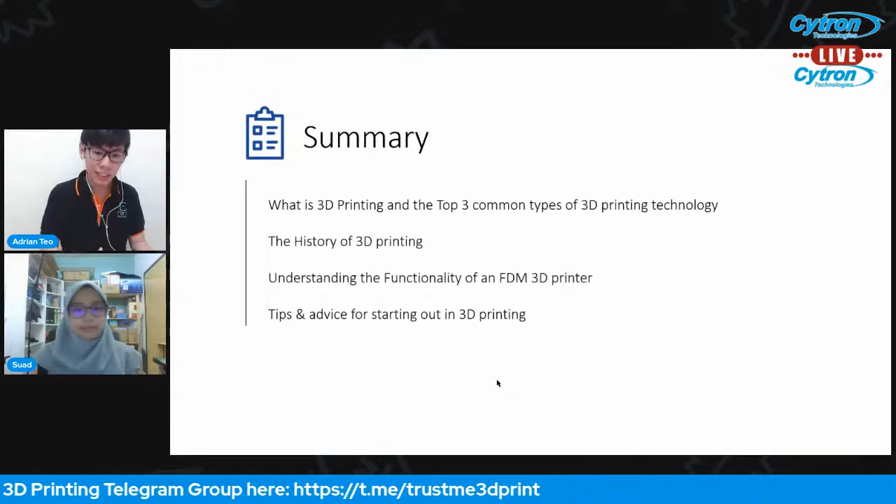If you just joined right now, feel free to rewatch this webinar — you'll be able to see how she demonstrated the FDM functionality of her Ender 3 V2. And lastly, we talked about tips and advice for starting out in 3D printing. Due to the lack of time we have right now, we're going to bring some of the questions to our Telegram group.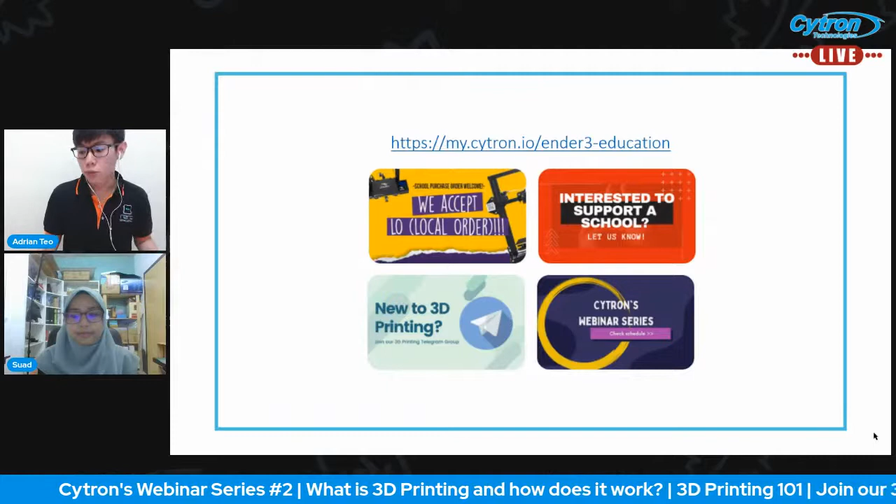Before I conclude, I have something to share with you. Right now, Cytron, we have this Ender 3 education page on our website. If you visit this page, you'll see 4 huge buttons at the bottom of the screen. We are highly supporting schools to get their hands on 3D printers because schools need to teach 3D modeling as part of their RBT subjects, and we are encouraging teachers to practice 3D modeling without fear of facing any issues.

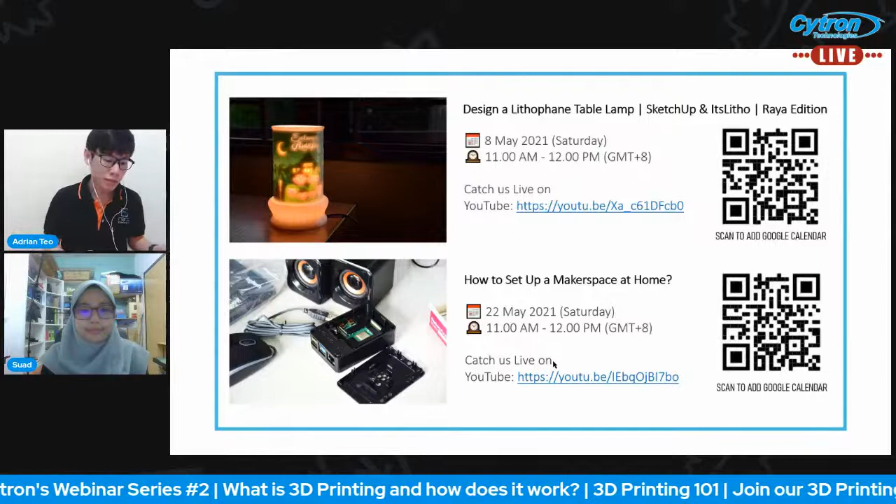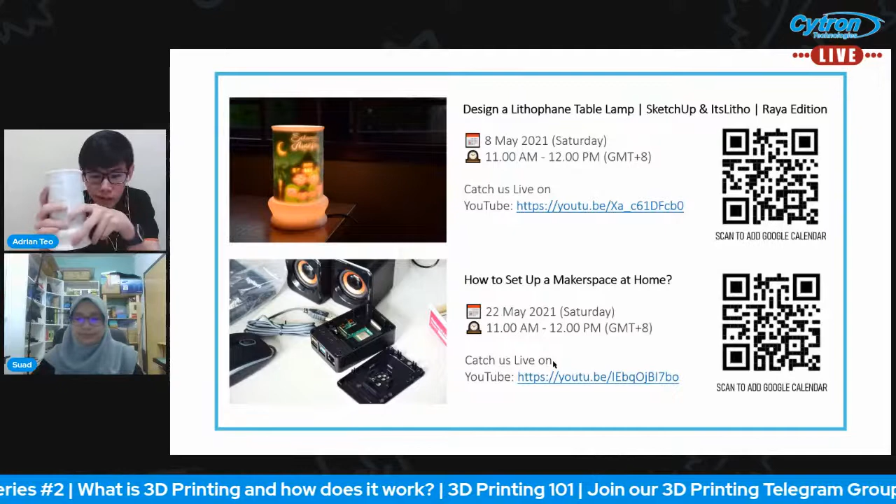I'm going to spend 30 seconds to share about this. Next week we are going to have a lithophane table lamp using a 3D printer. A lithophane is this lamp, this is a lithophane lamp. We are going to show you how you can design this lamp. It's a very cool gift for your family, for Mother's Day, for Raya. So we'll teach you how to design this and how to use SketchUp to design the base.

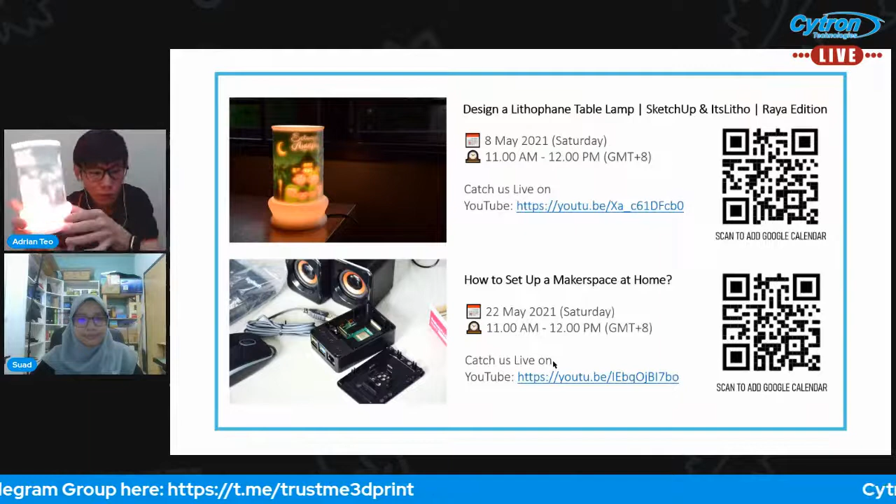It's the same time next Saturday, 11 to 12. And of course I will show you how you can make it colorful. You see, I have color here, over here. See, I have color, so this is a colored lamp, a colored lithophane lamp. I'm not sure if you can see it clearly, but in the photo there it's colored.

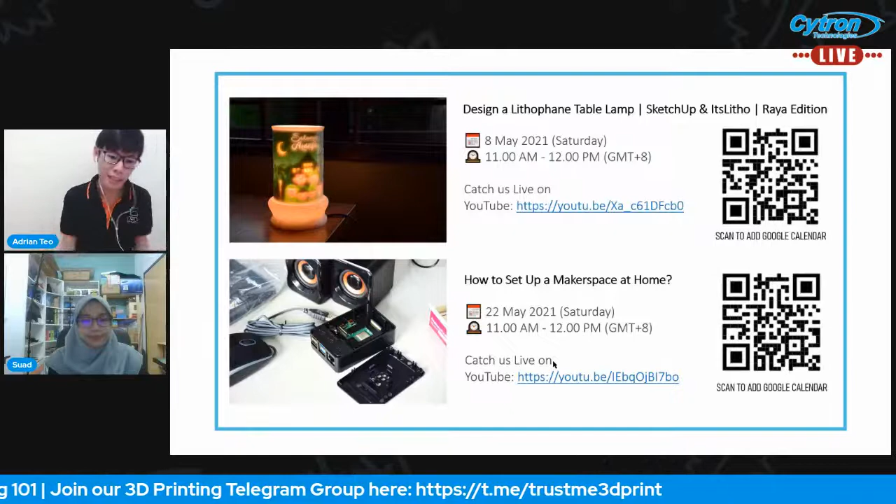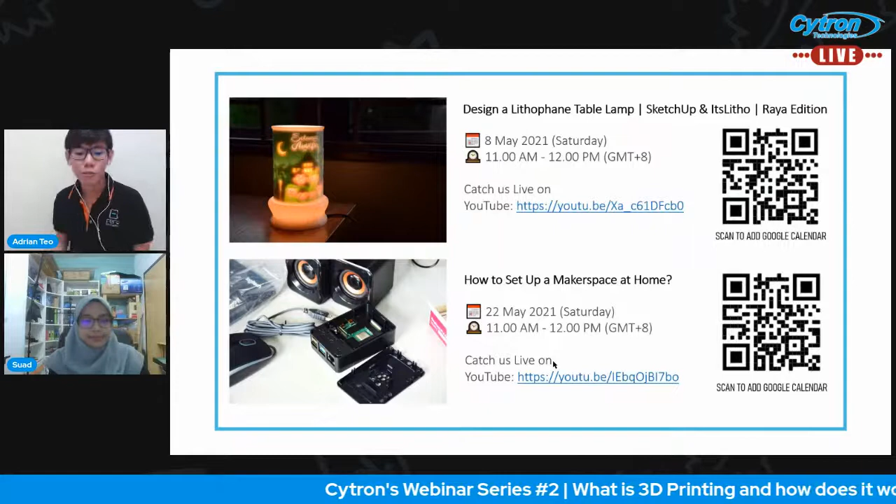And the week after will be Raya, so we will stop for one week for the webinar. The week after Raya, we will have a how-to-set-up-a-makerspace-at-home webinar. I will share with you what you need to start your own makerspace at home and start your digital making journey.